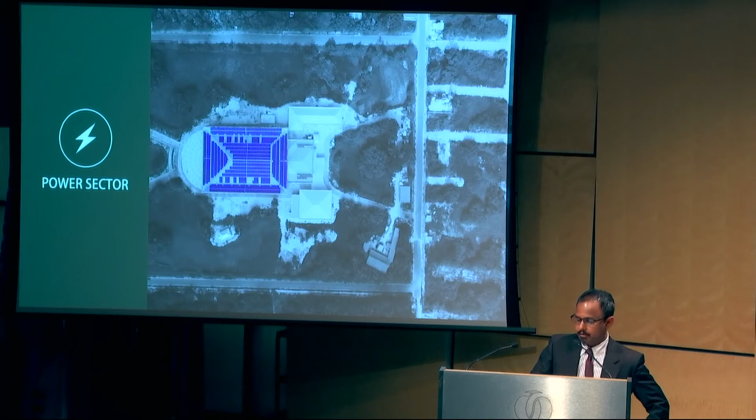So just to give a bit of background on the Maldives, we have around 1,190 islands, out of which 188 are inhabited, and over 100 resorts. We also have a population of 500,000, and our GDP is around 80 billion. That's in rufiyaa. So our angle on renewable energy is being at the forefront in fighting climate change, but also reducing the dependency on fossil fuels.

So I'll start with a brief background on how the power sector has evolved. When we compare the energy imports to the country, that's almost equivalent to around 80% of the GDP. And of the imports, around 80% goes to diesel only. Out of that diesel, about 65 to 70% goes to nationwide electricity production. This is just to give you an idea of the magnitude. These are the CIF values reported in 2016.

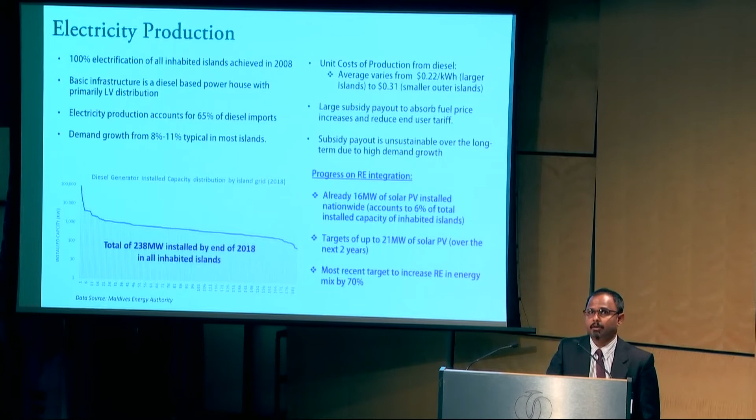So basically one of the key issues is the cost of production, which ranges from 22 cents per kilowatt hour in large islands, and it goes up to 31 cents in smaller islands, and that's including fuel and operation and maintenance costs. So the fuel constitutes close to 70 to 80% of the cost of production. So that has the major impact on the actual cost of production.

Now, in order to sustain the end user tariffs, government is providing a lot of subsidy to sustain that, but in the long run, the fuel bill keeps on increasing, and we need a way to address that, and that's where renewables come in. There have been a number of renewable projects conducted over the past decade or so, but most of them in the beginning were very small pilot projects, and at that time there were a number of funding issues because renewables were much more expensive then.

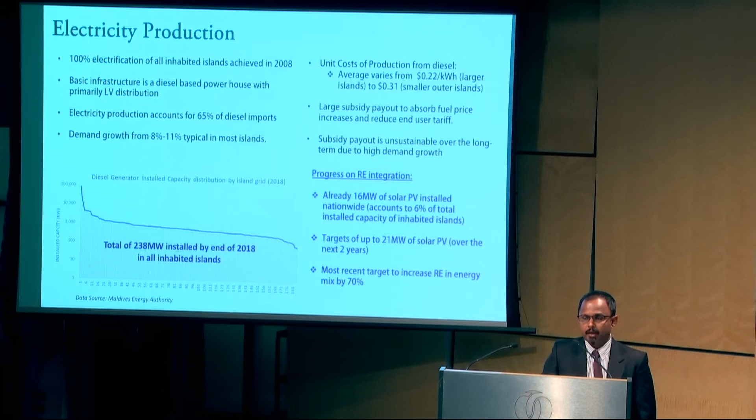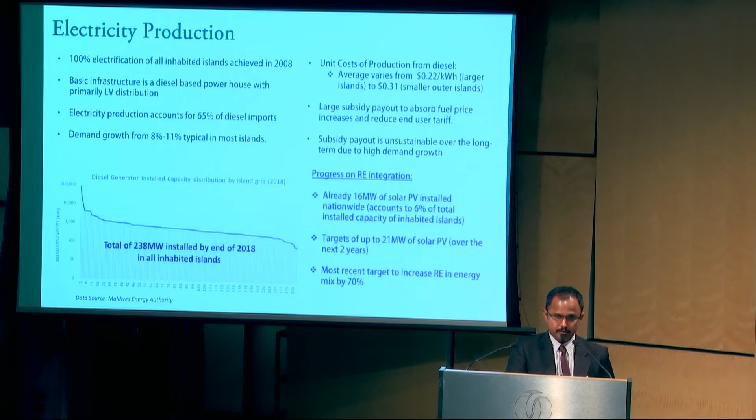And right now we do have 16 megawatts of solar PV installed so far, and our next target in terms of project implementation goes up to 21 megawatts. And we do have a target revision from 10% of energy to 70% of energy mix in the power sector, which our minister has also highlighted in the climate summit.

So these are some of the key challenges in power generation. Geographic distribution limits us from interconnecting the grids, and we don't have a unified grid which enables efficiency, and all these isolations also increase cost of production at smaller scale. And there's also limited human resource capacity, especially in the remote islands, which limits overall efficiency due to improper maintenance. And there's obviously a high demand growth, so we really need to keep on increasing the megawatt installation capacities.

So on renewable energy, in order to progress our work, there have been a number of interventions that happened over the past couple of years. I'm just highlighting some of the key interventions, both from the policy side and the regulatory side. So one of the first interventions was the duty exemption introduced in 2012 through an amendment to the Import-Export Act, and that has also been delegated to the Energy Authority for the implementation of this process.

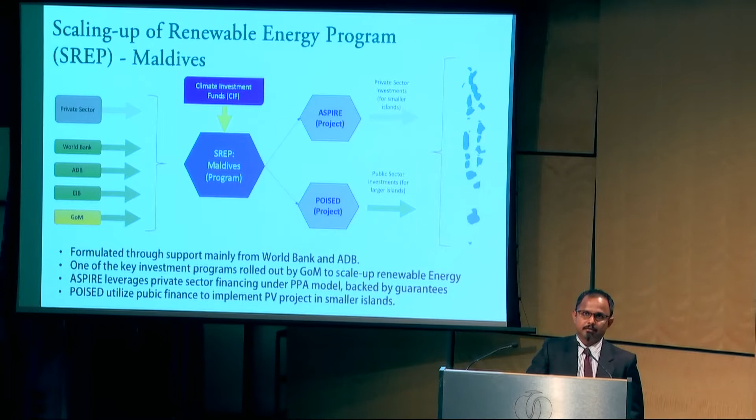So I'm just going to quickly run through it, and just to mention, SREP is initiated through the Climate Investment Funds, and that gives us an overview. With POISED, we had a number of experiences with a number of islands, and we have around 50 to 300 kilowatt systems installed, with energy mix in the range of 10 to 50%. And in the ASPIRE project, we looked at 1.5 megawatts, 5 megawatts without storage, but in the next phase, we will look at large scale storage, possibly in the range of 50 to 100.

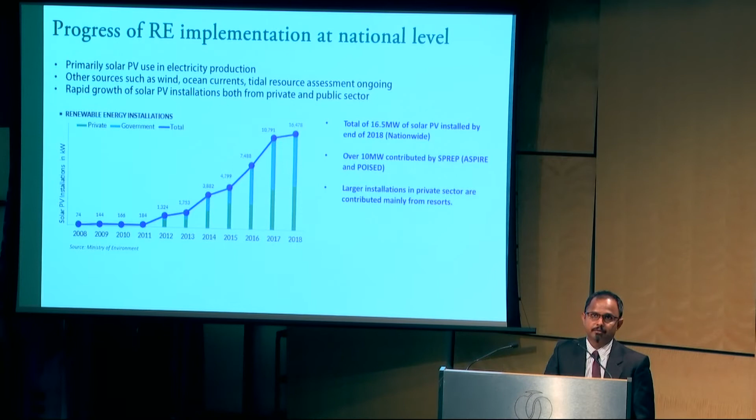So this graph shows how the PV has increased over the past 10 years. It has grown up to 16 megawatts exponentially, and we hope to more than double that in the next couple of years. So again, our new target is 70% energy, and so that means we'll need to shift from that.

We're getting frantic signals from the back about time. So. Okay, yeah. I'm just on the last couple of slides.

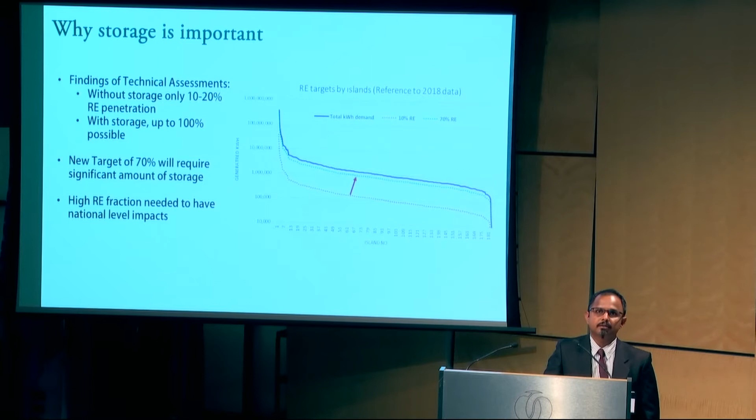So we'll need to move from the orange line to the green line if we are to achieve those targets. So basically, moving on to storage, we'll need to look at much larger scale, and although we've been experiencing scales of kilowatt hours, we'll be moving on to megawatt hours hopefully in the next set of sub-projects, and we are in discussion with the World Bank in project formulation.

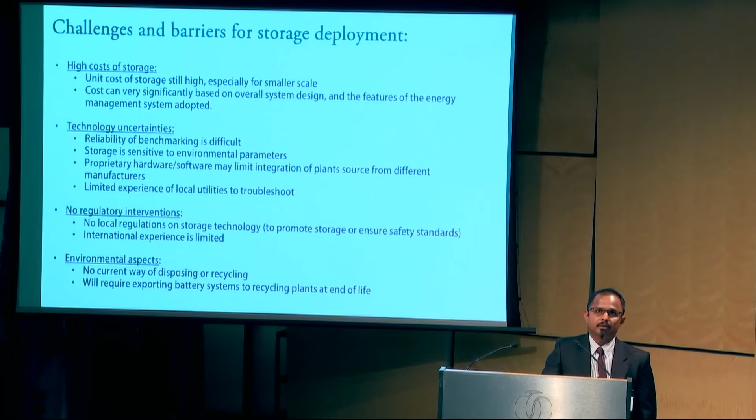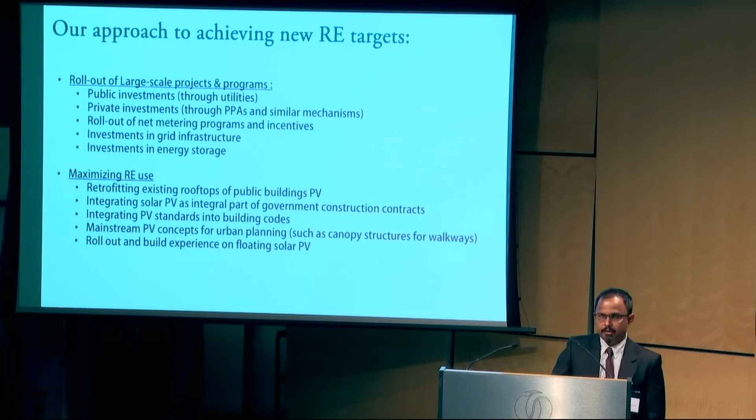So I'm just gonna skip those slides, and some of the actions needed would include incentives and capacity building, knowledge exchange, as well as exploration of new technologies. And so our key approach would be to roll out much larger scale programs in order to achieve these high targets, and also look at granular level interventions on maximizing renewable energy use.

So I think that sums up the presentation. I'm constrained on time, so I just wanted to highlight on the last slide that 70% is our new target.

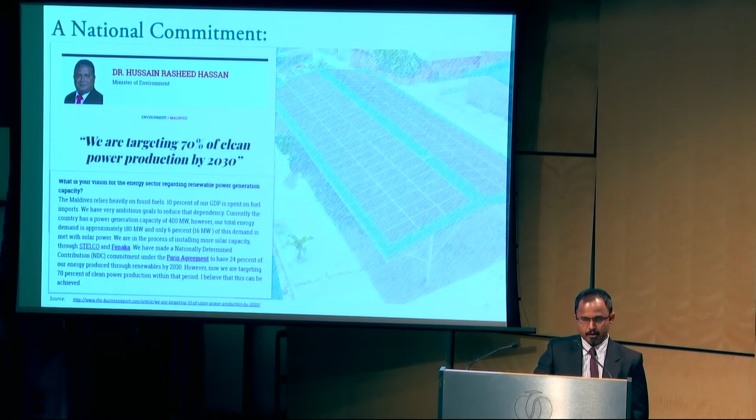Thank you. Okay, great. Thank you very much. Yes. So I have 10 minutes? 8? Let's say 8. Okay, better. Akram, you owe me a drink. Yeah. Okay. I'll take 2 by the time you...

Okay, so those who were here in the regulatory session, hello again, and those who were not, I'm Harsh Thakkar. I represent India Energy Storage Alliance. And in this session, I'll be talking about 3 emerging applications in the India market, which are very much scalable at this point of time, but require some kind of intervention to scale things up.

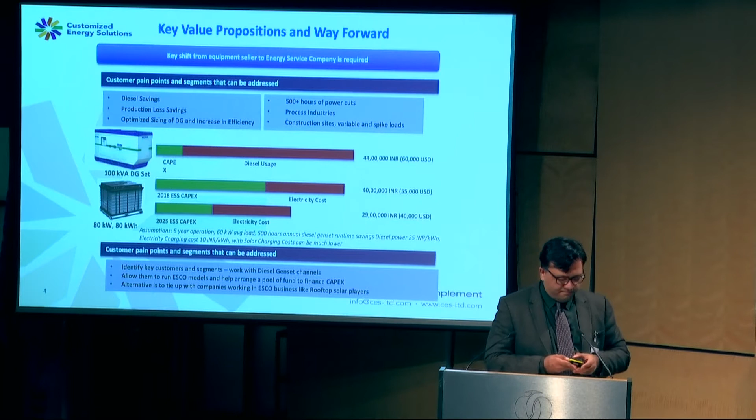So these are some early adopters. Almost 100,000 towers where diesel gensets have been removed or the usage has been minimized, 5,000 ATMs, over 1,000 microgrids, where there was a DG which was selling 60-cent power, and a microgrid came in and it was selling 30-cent power.

So there was a village where a microgrid came in and it replaced the diesel genset guy. The genset guy was then buying power from the microgrid and he was supplying to the village. But the bad news is, after some point of time, the load increased and the microgrid had to install the diesel genset. So those are some kind of interesting stories from the ground.

And when we speak about rural electrification, India achieved 100% electrification this year. Thanks, we had an election this year. So the majority of it was done through grid. So grid has reached, but electrons have not reached yet.

And yeah. This is fun. 8 minutes is fun, yeah.

So what happened this year is more than 1 million of these villages or households were basically reached through a solar panel on each household, which was backed with a lithium-ion battery. So as you can see, that yellow and blue thing, the majority share last year for technology in energy storage in rural India was lithium-ion, which is not always the case because most of the microgrids are built with lead acid. But last year, most of the household systems were installed with lithium-ion.

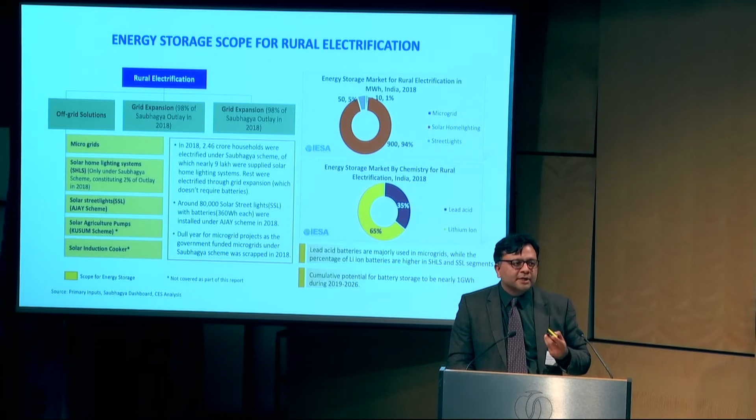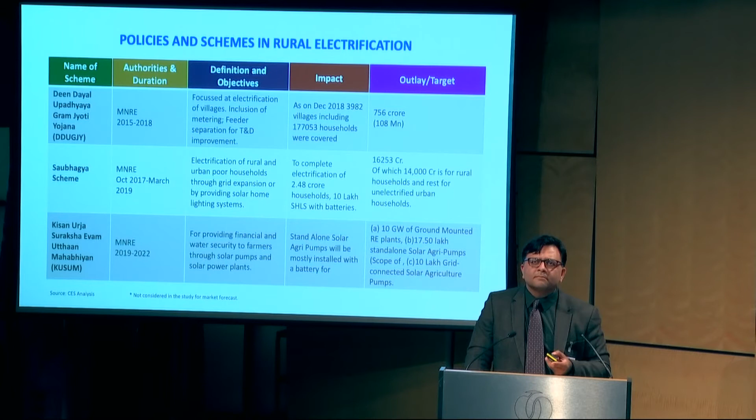And yeah, I'll just skip this one. Is there some direction where I should be clicking? Okay.

very low. It has been 18% to 20% on average because initially you don't have a lot of load. Then the solar generation, which is almost 4 to 5 kilowatt hours per kilowatt peak of solar installed in India, we are seeing these microgrids are doing 2.5 units. And the battery efficiency is much less than what the manufacturers are claiming.

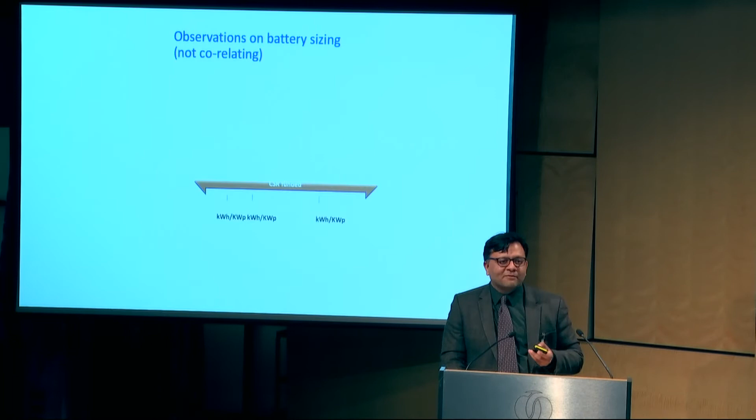So generally, we have been hearing that microgrids have been designed with the help of Homer and similar tools. But our observation is it's more designed by the kind of funding they have. So if it's government funded, the battery is generously sized. If it's CSR funded, the size is smaller. And if there is funding which requires a return, the battery is sized even smaller.

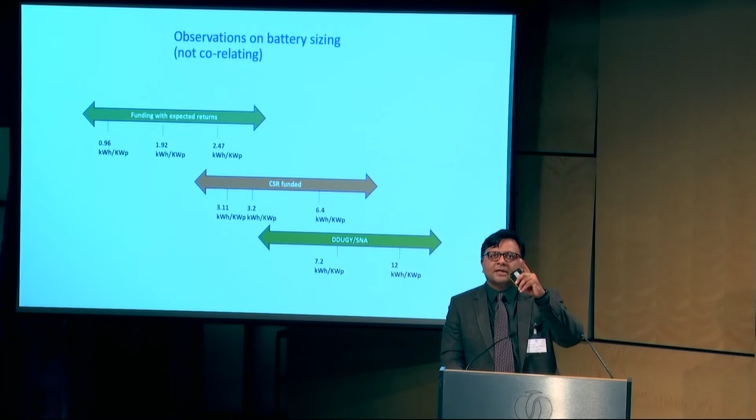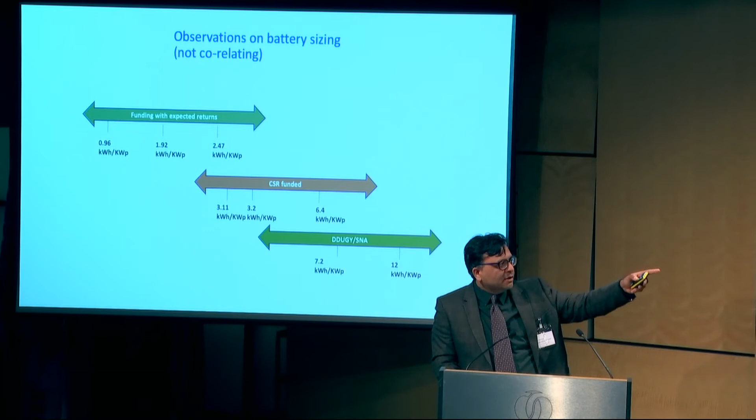So you can see in a government tender, they ask for 7.2 to 12 kilowatt hours per kilowatt peak of solar. That's the ratio of battery to solar. In CSR funded, it's mostly around 3 to 6 kilowatt hours of battery per kilowatt peak of solar. And with funding with expected return, and the return is almost 6 to 10%, it's almost 1 to 2.5 kilowatt hours per kilowatt peak of solar. So there is no Homer being used here. It's pure funding.

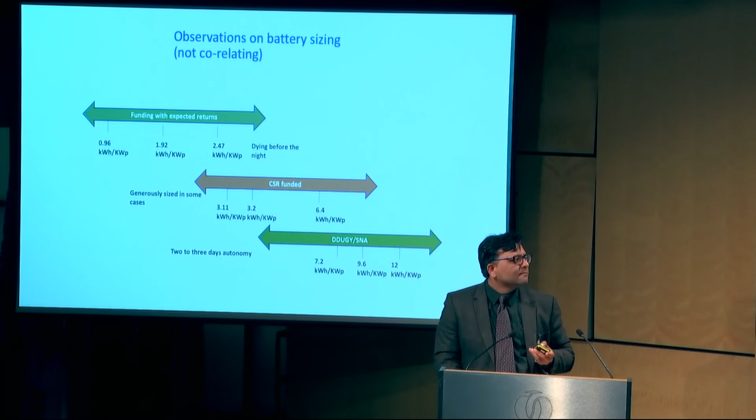And this has been the issue with lead-acid batteries on the ground. We have been seeing almost a 10 to 20% capacity fade in a month, in 20 to 25 cycles. This is actually a test done in the lab with a solar plant. And we have seen that with 80% DOD cycles, the capacity degradation in a new battery in the first month is 20%. Now this is lower if the DOD cycles are lesser, which generally they are.

But the problem is you require equalization intervention with these batteries, and it's a very difficult thing to manage in grids like Asia and Africa, where the skill sets at ground level are very low, and they are not able to do this kind of O&M with the batteries.

So hence, here we require support of different technologies, and right now these markets are thinking about second life lithium-ion batteries, but we would have some kind of issues there with these trials, because mostly right now it's the Western markets and China, Japan, which are having an excess of used batteries.

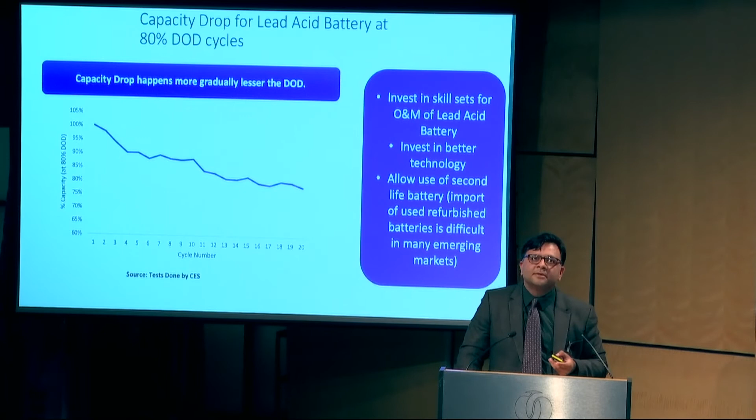And to bring it to emerging markets, the regulations won't allow, because with respect to lead acid, the used batteries are basically a hazardous waste, which cannot be permitted. So we would need to work around regulations for doing some pilots there. So yeah, that's on the rural microgrids.

And battery can basically allow you to have a higher penetration of rooftop solar in a particular network. So that would be very helpful, and I finish my presentation here with these 3 cases.

Okay, hi, my name's Dr. Matthew Rowe. I am from DNVGL. As you've got to listen to me talk for 10 minutes, and then I'm also chairing the next panel after this, I'll just spend 20 seconds introducing myself. So I work for DNVGL, who are a technical consultancy. We're the global leaders in energy storage technical advisory services. We help people all around the world, investors, developers, suppliers, with things like business cases, running procurement processes, and taking on the owner's engineer role.

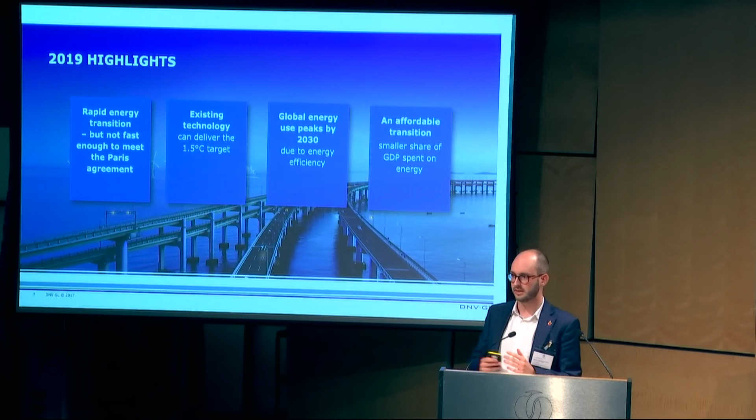Stop. Okay, some of the highlights of the Energy Transition Outlook report are that if we carry on with what we're doing with our energy transition, we won't hit the climate targets set out in the Paris Accord. But we do have the technology that will allow us to deliver those targets. So this really is a political and regulatory issue, and also how do we get the money into that. And we use this as a concept to frame the role that storage will play.

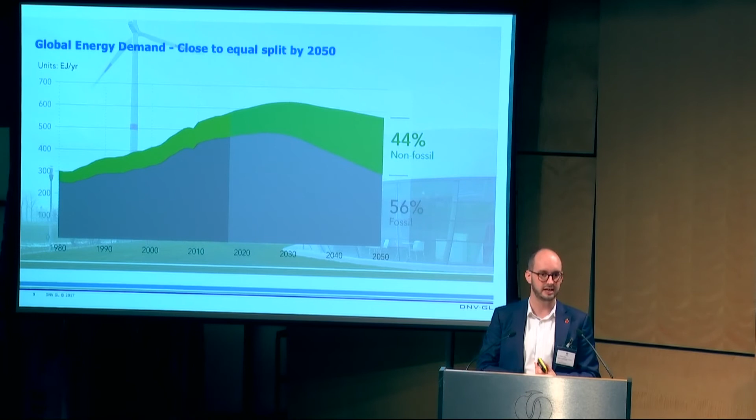Our forecast is that energy demand, across all different vectors, so oil and gas, coal, biomass, will peak at 2030. That's primarily driven by the fact that electric vehicles use about 3 times less energy than a typical combustion engine, so we see that being a big driver for reducing energy demand, and also energy efficiency will play a key role in that.

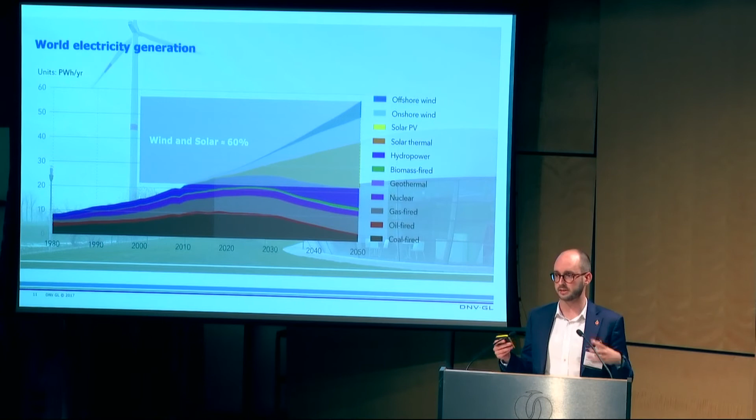From the electrification part, you clearly can see that renewables will play a big part of that. And in fact, about 60% of the electricity system out to 2050 will come from solar and wind. And actually, if you include in that biomass and hydro, you get to about 88% in 2050. And that's a very different energy system than you've got today.

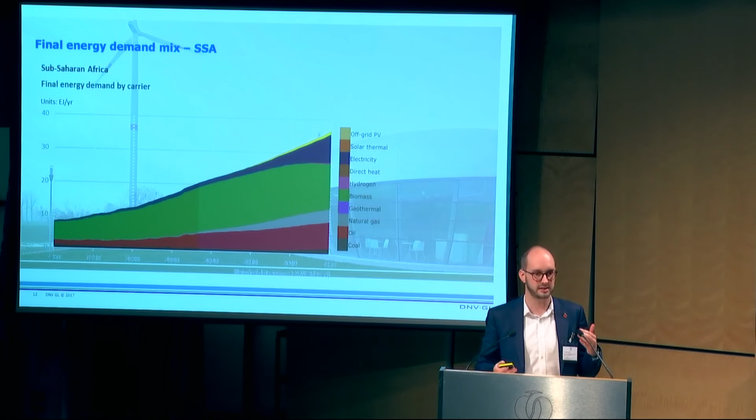Now, if you look at a developing region like Sub-Saharan Africa, for example, that's very different, because in Sub-Saharan Africa, where you've got very fast population growth, you actually see demand increasing. So if you look at this plot, you can see that it's increasing out to 2050, and then compare this to what you would see in Europe, it's the complete opposite, where you see the demand decreasing.

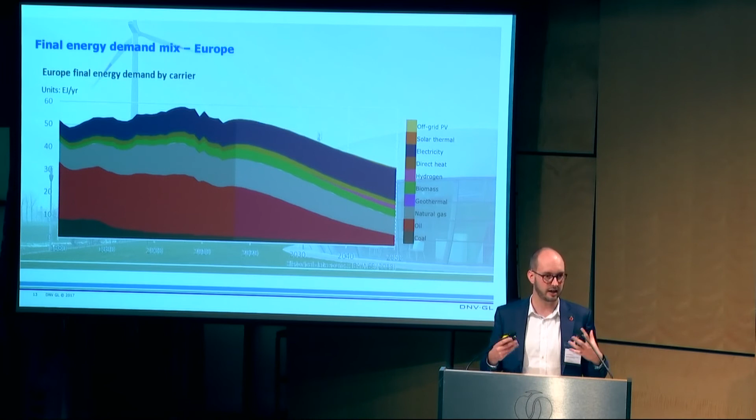And that gives a huge and very exciting challenge, because all of a sudden you have significant changes in your energy system, the way in which we deliver energy, the electrification of it, and all of the inherent challenges that that brings means that we need to look at how we're changing that system. And actually, within the report, we talk about the role that storage will play.

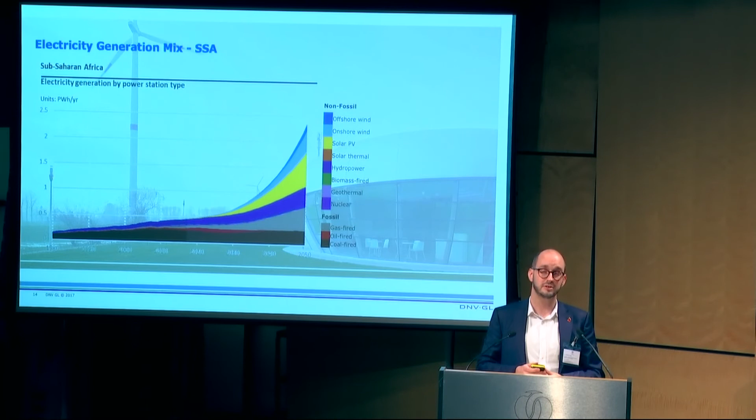But before, no, I think I clicked too quickly.

Before I talk about where we see the role of storage going, I just wanted to talk about some of the most exciting business cases as I see them. So we do a lot of work, and I spend a lot of time traveling around the world, but particularly in Sub-Saharan Africa. And there are 3 very exciting business cases that I'll touch on. In fact, some of them are very similar to the things you've touched on here.

One of the biggest drivers for storage in emerging markets will be displacing high-carbon diesel generators. In some Sub-Saharan African countries and in Southeast Asia as well, people are paying $300, $350 per megawatt-hour for diesel at peak times. Now, at that cost, the LCOE for storage is really competitive across 2 or 3 hours' worth of duration, and that's really exciting. High penetrations of renewables, being able to better balance your supply and demand, also combined with old aging infrastructure, means that storage can play a really important role.

And actually, even if you look in the US, some of the most exciting and obvious business cases there are, instead of upgrading your networks, your transmission, your distribution networks, you can delay that investment cost by putting storage in, and that really helps the business case. In fact, some of the most exciting business cases are around that.

So if you can combine any of those things, so if you find a country where you're paying really high costs at peak time for your diesel, combined with very old aging infrastructure and rising demand, that's naturally a really exciting and good environment for storage. And one of those countries that matches that requirement is South Africa. And in South Africa, for those that don't know, the World Bank are funding 1.4 gigawatt-hours worth of batteries that are being rolled out by Eskom.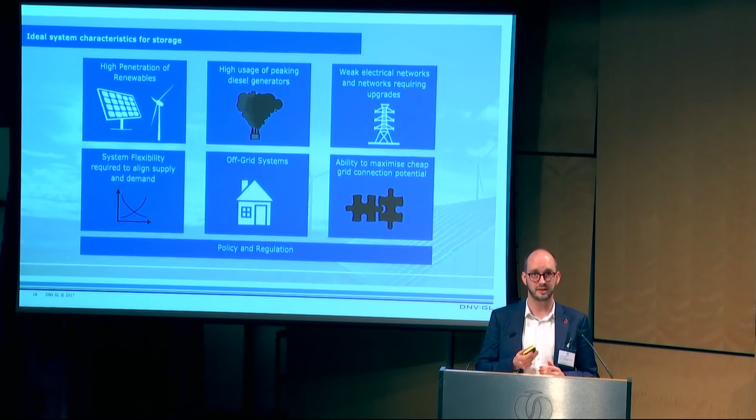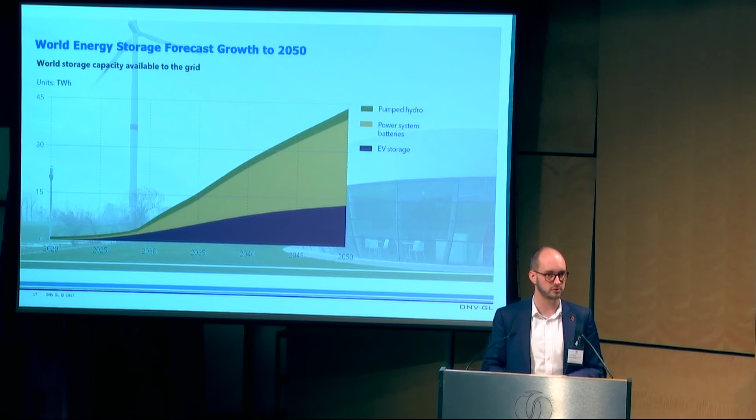And in fact, that battery storage in our transition outlook will fit across 3 different areas: utility scale applications, commercial and industrial applications, and also off-grids and mini-grids. And we see a lot of mines at the moment, particularly in developing countries, coming to us and saying, we'd really love to not have to transport diesel over long distances, or we've suddenly become really reliant on a grid which is very unstable. How can we use storage and renewables to help that transition?

The Eskom project that the World Bank are rolling out is a very exciting program. It's all fully funded, and some of the business cases that we've seen there, where we've been running the techno-economic analysis on those business models, are very exciting. So this is looking at 2 or 4 hour duration storage that can displace diesel at peak time, whilst also deferring network reinforcement. So parts of the network where it's not easy to upgrade them because you end up cutting a lot of people off, or because it's very expensive to upgrade the networks, combined with being able to displace that as well.

And a lot of people today have actually asked about actual business cases in Africa, a lot of people wondering where we see applications. So here's a couple of actual projects in Africa.

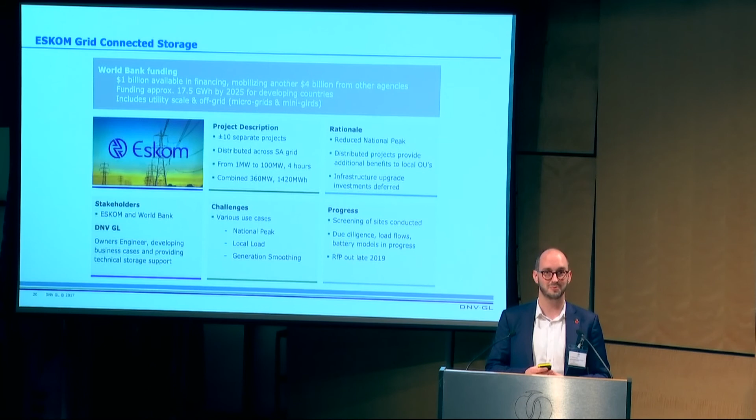So here are a couple of projects in Africa. We're part of a variety of programs that the World Bank are rolling out. We've run a feasibility study for the role of storage within the West Africa power pool, and that predicts that we need around 30 gigawatts of batteries or storage technology on the system over the next decade to be able to deliver the lowest cost of energy. So some really big numbers.

We're also running feasibility studies in places like Guinea-Bissau, looking at the role that storage can play in their energy system. And up on the slide there, you can see a variety of different applications as well. But what do we really learn as we go through these developing countries? Well, the biggest challenge is engaging with the policy and the regulators. The technology is actually pretty far on, but the real challenge we see in these developing regions is helping people quantify the value of storage.

It's very easy to do that with renewable energy, because it's obvious. You pump a bunch of energy onto the system and you get paid for it. But injecting one second's worth of energy at a really high power, which something like a battery can do, can be valued at a really high value, but we don't have the market or the policy or frameworks in place to actually be able to do that.

Some of the biggest lessons we've learned are that data in developing countries is incredibly hard to get hold of. I recently sponsored a project where we were looking at putting storage in two countries. One was a developed country, and one was developing. And it's so much easier when you know what the historic frequency's been, what the historic demand's been, how the generation mix has been dispatched. In some of the developing countries, we don't have any of that data, but we have to help them understand the value of storage. So data plays a really core part in understanding where it fits.

So, five things I've learned that I think are useful. Don't expect to see the same price you see in places like Europe and the US if you're running a procurement process. The EPCs, the manufacturers, don't have the same supply chain set up. Storage prices have done all sorts of weird things over the last few years. In fact, I was chatting to someone from IHS last week, and battery prices went up last year. No matter what you see in all these plots going down, there was a really weird imbalance between supply and demand, so last year prices went up, and now they've gone back down again.

And so when you then get asked to predict what the prices are going to do in a developing country where we don't have the same projects to benchmark against, it's really difficult to understand what price point you might get for different technologies. Utilities need help in quantifying the value, as I've said. And the bottom two are that we need to do more work in the feasibility stage in helping governments in different countries understand the roadmaps in storage as well. So there we go. That was all I wanted to talk about. Thank you very much.

Let me take one or two brief questions. Thank you. Zoe Norgate from the UK Department of Business, Energy and Industrial Strategy. Upstairs in the previous session, we were hearing about all these other interesting non-battery technologies, and I wondered, were there any reflections on the potential for deploying those in developing and emerging markets?